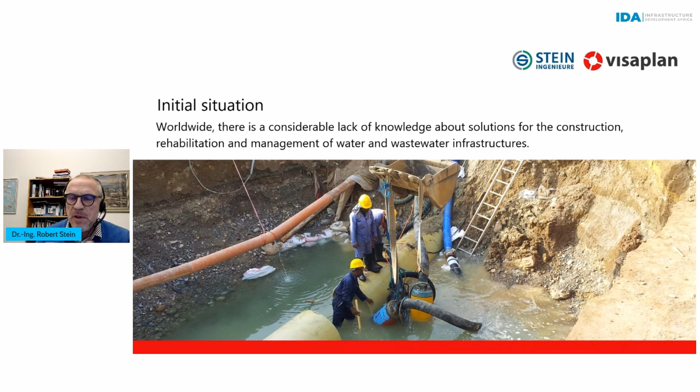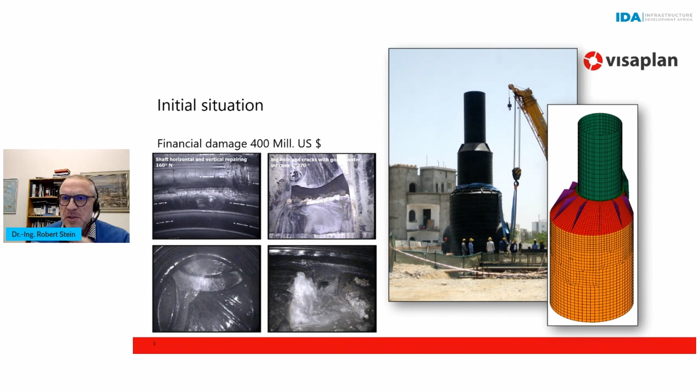Here, a picture from a Middle East country. Here, another picture - they installed plastic manholes worth more than 400 million US dollars. We were involved in the root cause analysis because all these manholes were poorly designed and doomed to fail. So they had to be completely replaced.

Or here, an example from a very rich, small Middle East country, a new pipe jacking project. And you see here the infiltration right after installation. So alone this project measure is defective right from the beginning.

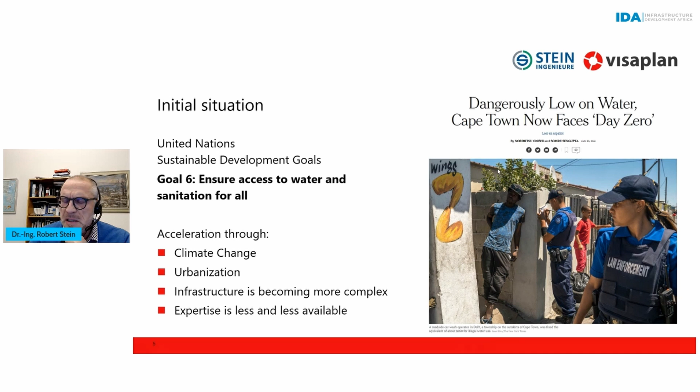So we have to install water supply and wastewater disposal lines, and we have to do it right because there are certain constraints. First, ensure access to water and sanitation for all - the United Nations Sustainable Development Goals - and this has to be done under acceleration aspects like climate change and urbanization. If you knew the news from 2017, where Cape Town was close to day zero, where it could not provide any more drinking water.

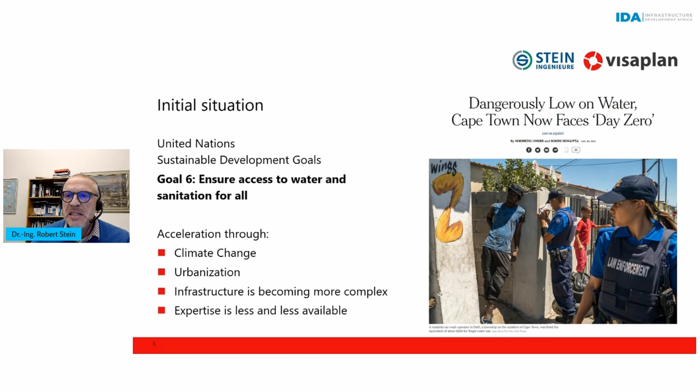And this infrastructure is becoming more and more complex. And the expertise to manage, operate, maintain, and rehabilitate this complex infrastructure is less and less available. So support is needed. All the countries need to have their own experts.

Therefore, we look for a work-process-oriented, lifelong learning approach by providing adaptive learning resources for all professionals, regardless of their educational background or qualification level - whether technicians or engineers, just from the university or an expert engineer. We want to do this via an e-learning platform called UNITRACC.

And this term stands for Underground Infrastructure Training and Competence Center. For 20 years, we have developed and visualized content here. Today, lessons are available for structured learning and working with didactically structured concepts. These lessons are grouped together into entire courses according to certain topics, which enables a certification process.

The platform, for example, includes more than 16,000 images, many of them highly visualized with 3D computer animations. It contains complete technical books or reference books in multimedia form. It includes animations, site documentations, virtual construction sites, and a lot of videos. So all the topics for installation, operation, design, rehabilitation, and management are visualized here.

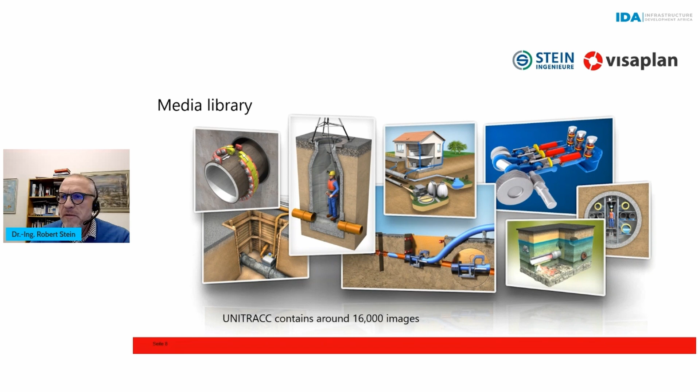How does such a book look like? Here you get some impressions. Also here you see that we highly use graphics and visualizations to get an easy understanding.

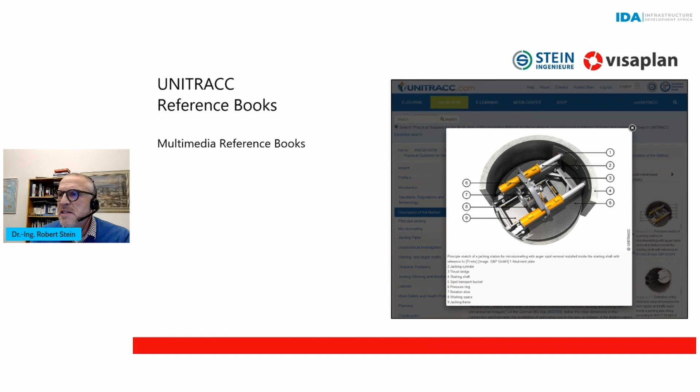Then we have real job site documentation, so you see the implementation of such a technique. And this is not done with just some slides - for example, the job site documentation includes task formulation: construction site preparation, rehabilitation preparation, rehabilitation work, and final work and test. Such a documentation can include 200 pictures.

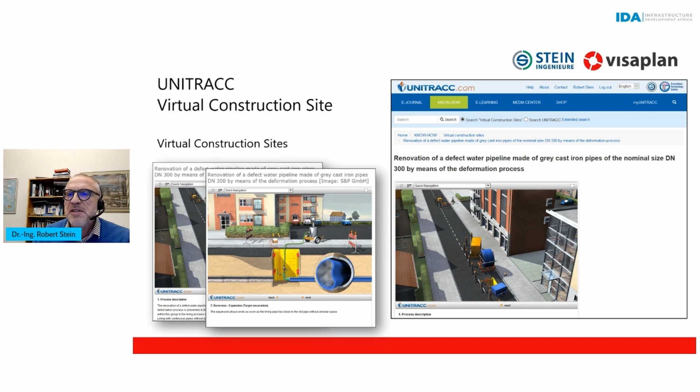Other concepts include virtual construction sites to get a fast understanding of an application or technique. The technique is completely animated. And because with 3D animation we can open the ground, we can see and show things which cannot be seen just by documenting it with a video or photos.

And all this learning is managed by your own desktop, where you can control your courses, see your learning progress, or communicate with the tutor.

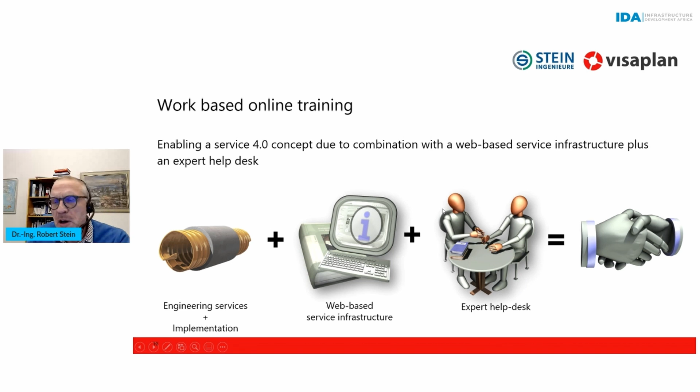In Germany, this is already used to train expert engineers. We have the DWA in Germany; in America it's, for example, ASTM, who is developing standards here in Germany and distributing, for example, all these online courses. So you can even get a DWA certificate. Internationally, we cooperate with the University of Waterloo, a university in Canada, which is our international education partner.